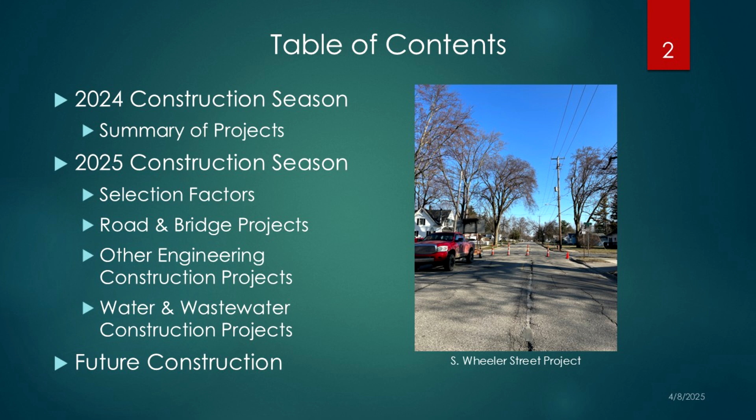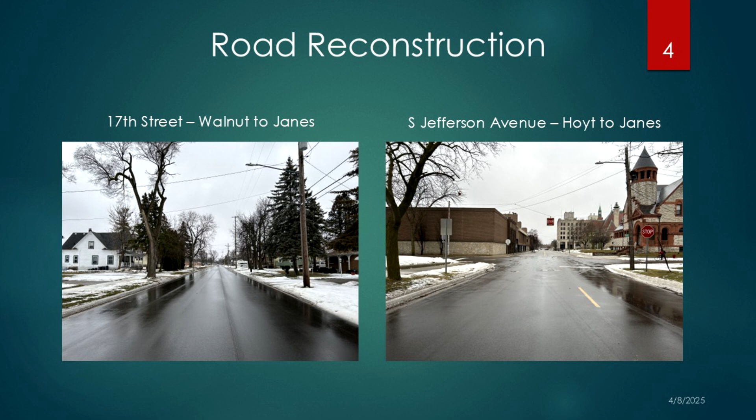2024, two of our road reconstructions: we did 17th Street from Walnut to Janes, which finished up the 17th Street corridor, and South Jefferson Avenue in the historical district over by the Castle Museum. We also did some road rehab on Sheridan Avenue, which included a crush and shape. We took that road down from 4 lanes to 3 lanes and added bike lanes on both sides.

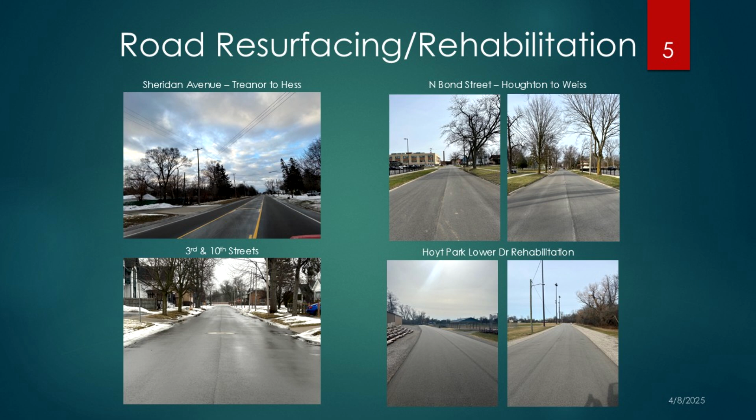Then with our CDBG money, thank you Planning Commission, we did 3rd and 10th Streets last year, and North Bond Street with the next fiscal year of CDBG money. We also did Hoyt Park Lower Drive, which I believe was the 101 funds. That was a nice cap on the Hoyt Park improvements, and as you can see, they're getting close to finishing their pavilion.

We did have one bridge project last year, the Center Street Bridge. We just had to do some steel beam repairs, so not a whole lot on that one.

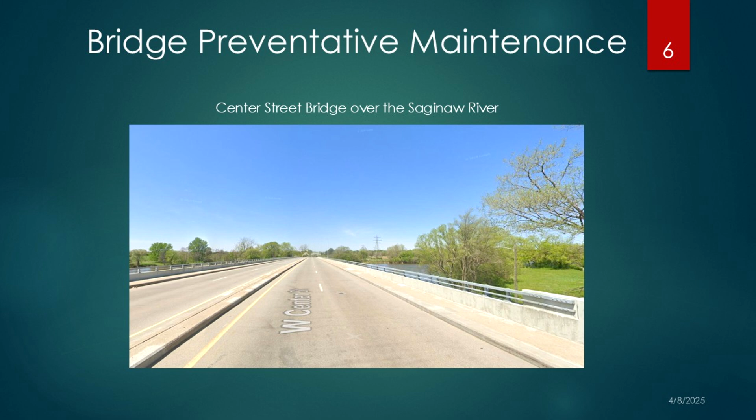Before I get into this, I realized a couple years ago we had some newer council members, so I had a couple slides on funding. I didn't put those in here, I apologize, I just want to do it quick.

Act 51 revenue is state and federal gas and weight tax, from gas taxes as well as Michigan license plate registration fees. That's how we get our funding for roads. Total, we're about 8.7 million for a year. Now that's not just for projects, that includes pothole patching, snow plowing, signal maintenance, pretty much anything you can think of, tree clearing in the right of way.

So of that, about 2 million is for local streets and the rest is for major streets. We also get about $1.2 million in federal funding through our planning organization, and those only go towards federal aid eligible roads. So you'll see, I'll point those out when we get further on.

And I apologize, I don't have slides for these, so I'll be switching here in a minute. We also rely heavily on some CDBG money every year, and thank you again to Planning Commission for recommending that award for this year.

So we try to hit a lot of those roads in the fair category to keep them from getting to the poor category. We look at traffic generators like the hospital and schools, and try to pick commercial areas as well, to benefit the most commercial people and residents in the city and make our dollar spread as far as possible.

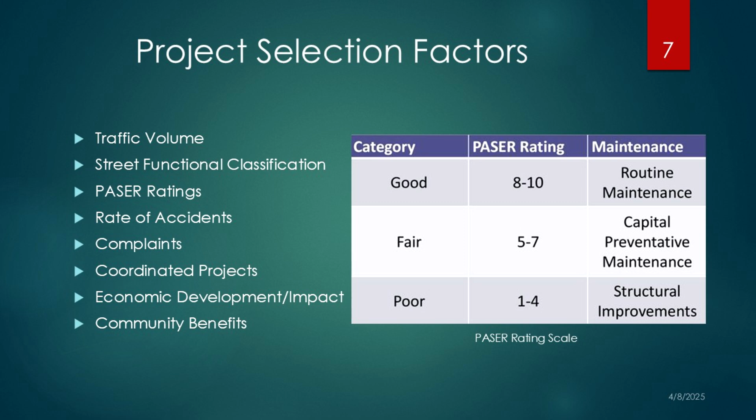This is a pretty ugly chart. These are our PASER ratings: red being poor, yellow being fair, and green being good. Just a snapback to 2021, about 4 years ago, we are improving slightly on both, it's just the funding's not keeping up with some of the inflationary dollars as well.

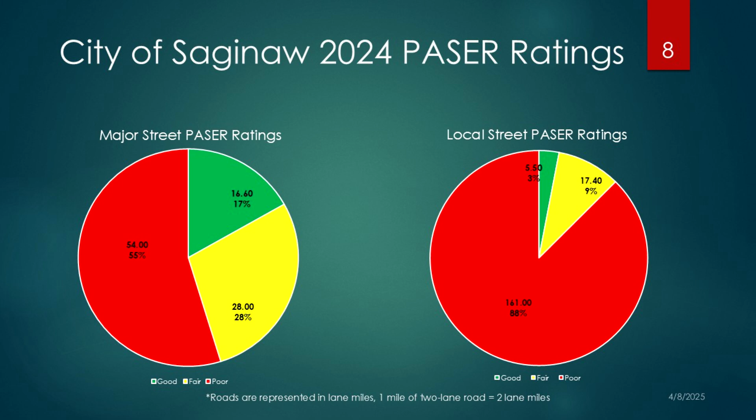Cost of construction's going up, and funding isn't really keeping up with that. Our goal every year is just to maintain our overall PASER and not make it worse. That's all we can do, which is unfortunate. I hate to say that, but that's what we do.

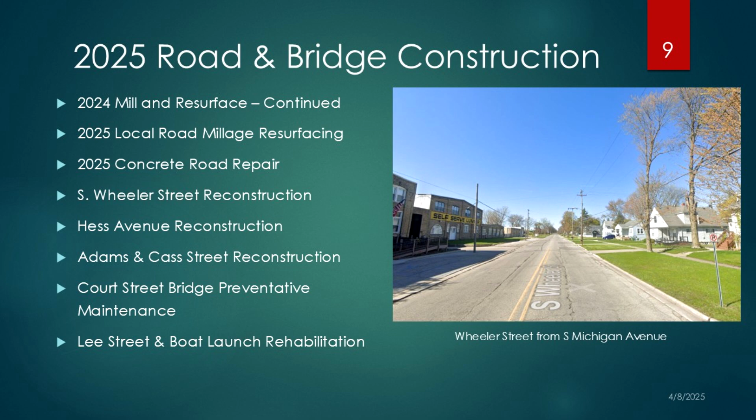During the winter, the asset management plan was completed for water and sewer. So we're looking to add water main work on Fayette from Court to Madison, that's 4 blocks, which is on the CC. That's the majority of the increase on that CC. But we did add Harrison as well, a critical link for Covenant, because we had good bid prices, so we wanted to add that money to this PO as well.

Besides Harrison, we're going to be doing Fayette, Webster, and all the streets bordered by Webster, Madison, Court, and Michigan—that 3x4 grid area. We've already done some of the ramps. We're looking to resurface those roads after the water main's been done, assuming approval tonight. Hopefully once that's done, we'll have those completed by end of June.

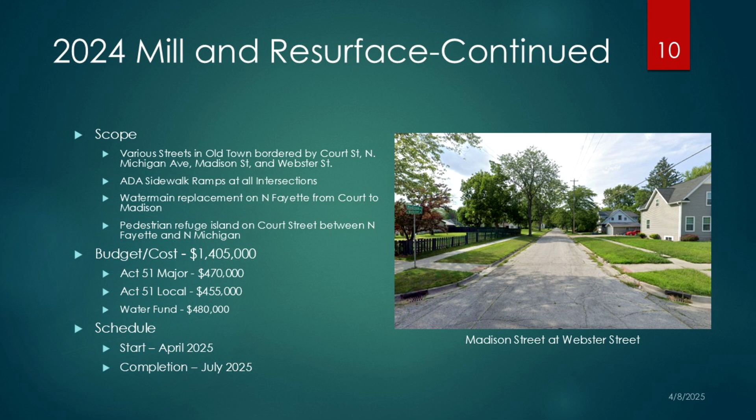As you all know, in 2024 we passed a road millage countywide. The city gets about $1.2 million of funding from that for local streets every year. We started getting some of the deposits this spring, and in the new fiscal year after July, we're going to start implementing some of that money. The first area we're looking at right now is between Court and Mackinaw and Webster and Mason.

I think the estimate right now says 1.2, but we're probably at 1.3 or 1.4. We're going to try to use some of our local street funding as well to do that. That'll be a good sized project for us—about 3.4 lane miles, which is almost 2 miles total of actual road being resurfaced. We're looking to start that in July and have it done about Halloween.

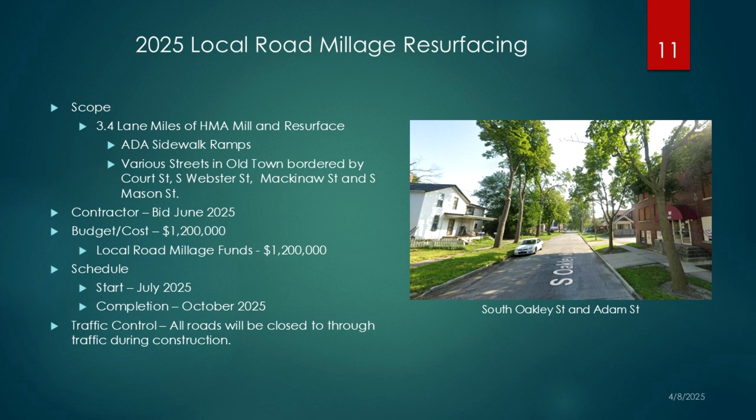Concrete road repairs—this was on here last week, but as of today, if we finalize our budget cuts, unfortunately we will not be able to do this project. So, apologies.

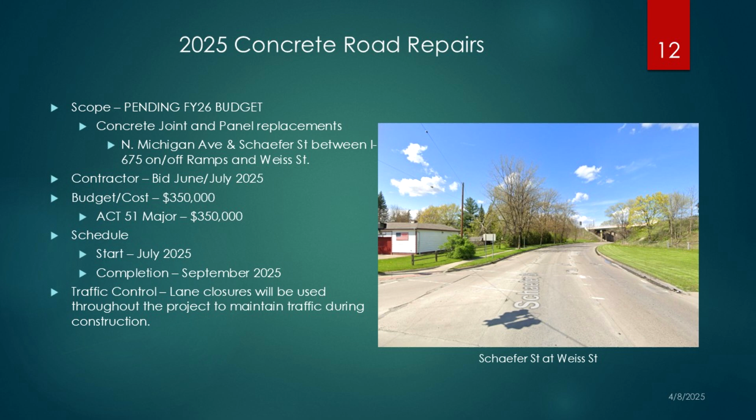Here's our big project, probably the largest road project the city's done—I can ask Phil, but it's probably one of the largest in the last 20, 25 years. It's a full mile of Wheeler from Michigan to Gratiot, full reconstruction, brand new water main the whole stretch, and also from Ring Street to the south we're doing a mainline sewer, which is the first time we've done one since I think 2017, 18.

It's a kind of unique project, and with this one we're also replacing the railroad crossing, about halfway through that section. We're utilizing 1.44 million of federal funding, and then the rest, as you can see, is road funding, water, and sewer to make up the match. It says we're starting March 31st, but they're not actually starting until next week. We're looking at a completion probably around the end of October.

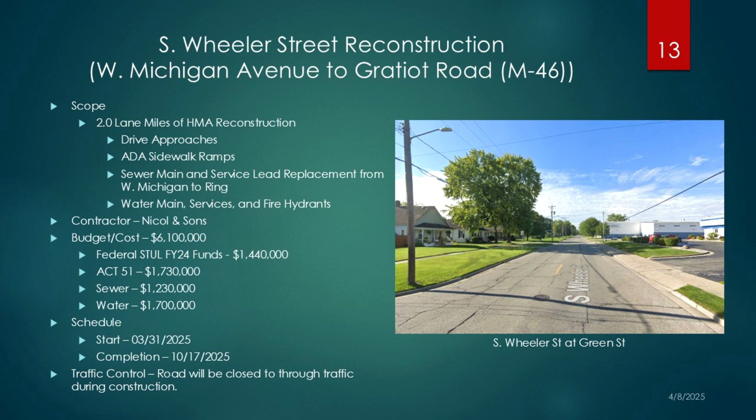Hess Avenue reconstruction—this is also using federal money. This is the last fiscal year we received extra money for a couple of years, so we've got a lot of federal jobs this summer. This is a reconstruction from Jefferson to Sheridan, half a mile. We're going to be converting this from 3 lanes to 2 lanes, and hopefully converting from 1-way to 2-way as well.

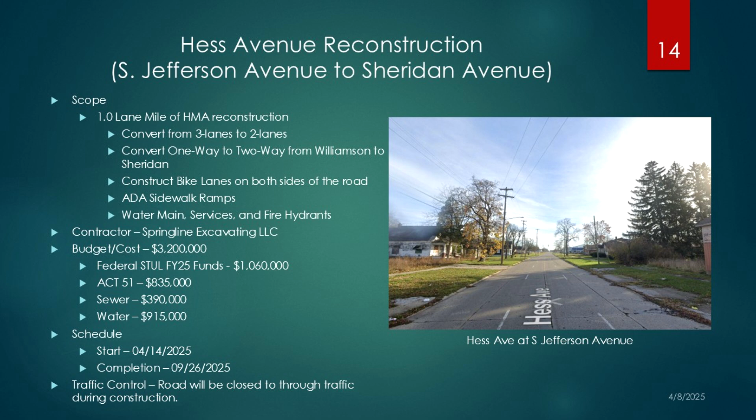That'll be coming probably at the next 1 or 2 council meetings for approval. We're hoping to get that conversion to happen from Williamson to Sheridan. With this project, we'll also be putting bike lanes all the way from Williamson to Sheridan to connect with the bike lanes we just put on Sheridan. Our goal is to eventually get them to Center Street Bridge so we can connect with the trail and the Iron Belle that crosses there as well.

Next one is Adams and Cass Street. This is the one we've kind of all been waiting for 4 years. We're putting back Cass as a brick road, brand new brick. We got a TAP grant for this in the amount of about $825,000. This is a project we're kind of excited for. We'll have an archaeologist on site because there may be some sensitive areas there. We're hoping we don't find anything, but if we do, I want it to be a mastodon.

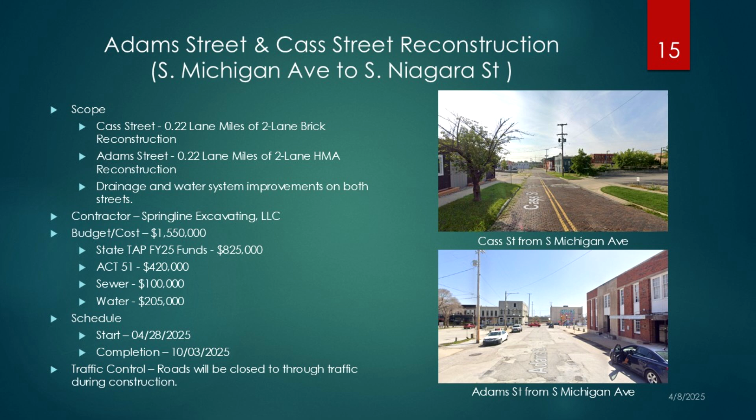They found one on the west side of the state maybe 2 years ago, and that was pretty cool.

We have, and I'm sure everyone has seen, a lot of work going on around Ezra Rust and Court Street. We do have the Court Street Bridge closed. I have a completion date of June 20th, but we're hoping to have that open sooner. They started early and they've been hitting it very hard with the good weather we had for a while. We've got a lot of deck and sidewalk patches there, railing repairs, and we're replacing all the handholds for the street lighting. That project is funded 95% by state and federal bridge funds, which is a program we utilize every year. It's the best bang for your buck you're ever going to see for grants.

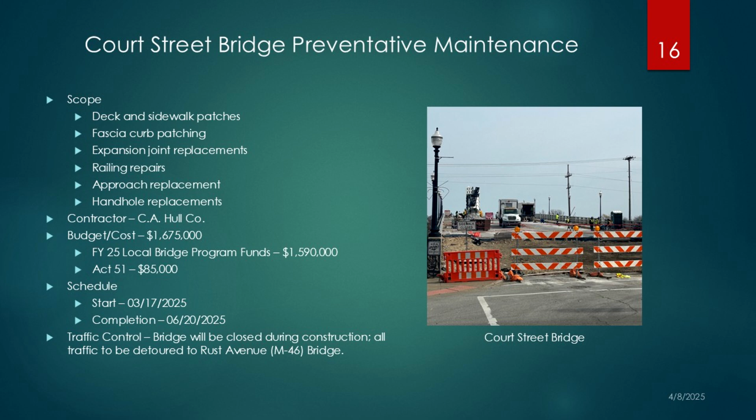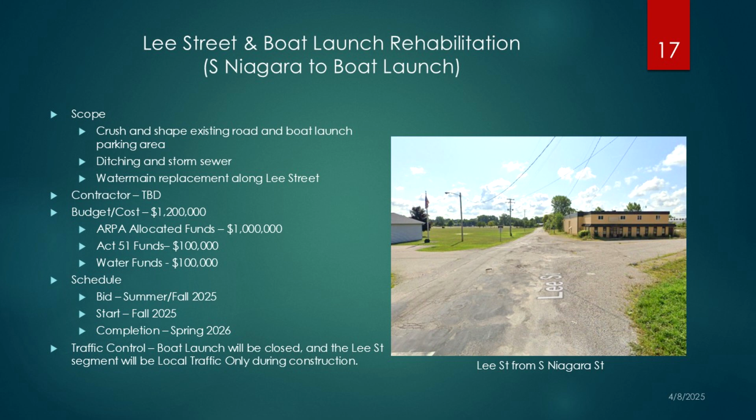Next one is Lee Street and boat launch rehab. Lee Street goes from Niagara down to the Rust Avenue boat launch. This project is going to be utilizing ARPA funds. We were able to add some of these extra projects with ARPA from the Ojibway Island savings. We saved probably about $2.5 million from the bids on the Ojibway Island stabilization project, and so for park purposes, we're utilizing that here. So we're excited, this road is a local road, we don't have a lot of funding for it, and the boat launch is in need of some serious repair. We're hoping to start that in the fall, probably complete it in the spring of 2026.

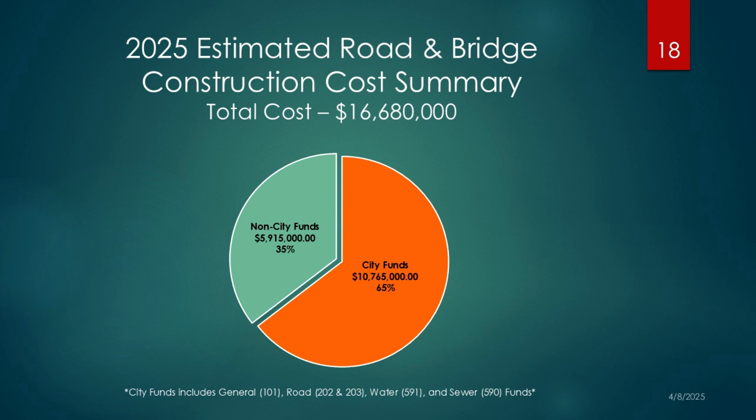This is just kind of a snapshot here. We do this every year just to show where we stand. Right now we have about a 65% match on our grant funding, so 35% includes the federal, CDBG, any bridge funds we have. Last year was 50-50, it was a good year. So we try to stretch the dollar as much as possible.

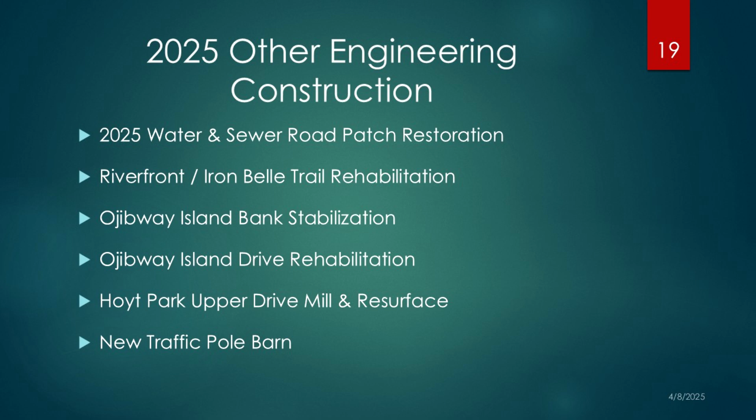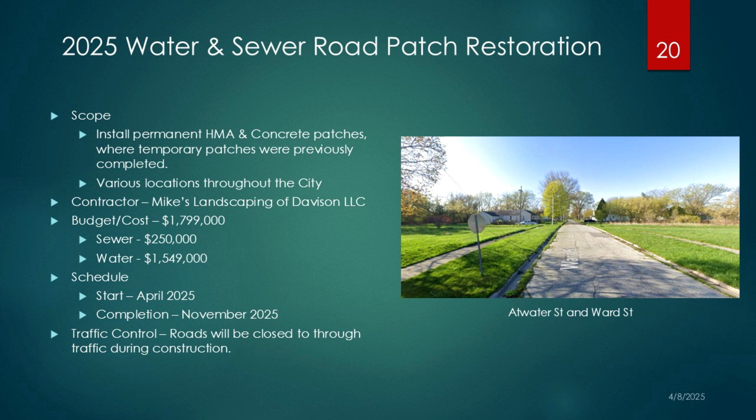Some other kind of non-road projects, per se. As everyone knows, we're replacing lead lines in the city as fast as possible. I think they all have to be done in the next 10 years. Our guys can't keep up, so we're continuing to bid out water and sewer patch projects, which I think was awarded maybe 2 meetings ago for the next round. So this is probably going to be a yearly project for a long time until we get caught up, but I just wanted to throw that on there.

We also got a grant from the CMF Spark program for the Riverfront Iron Belle Trail rehab. This section goes from Wickes up to Ojibway Island. We did the Wickes Park piece 3 years ago, I believe it was completed. This is a zero match grant, excuse me, we do have some extra costs in here. We added some extra work, so we'll be matching some of that. That will include rehab of that trail and also adding a trailhead on the south end. This picture here is actually that gravel loop that's just off of Fordney at Wickes Park, and we're going to be paving that loop as well so it's not underwater every time we get a rain event. We're also putting in probably 7 or 8 parking spots there for bikers.

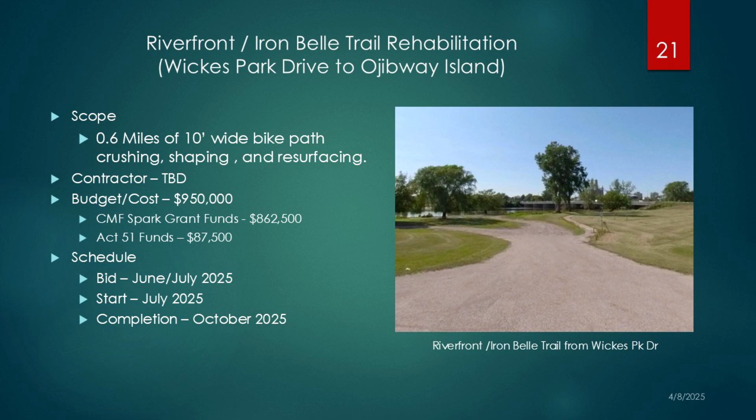Ojibway Island and Crayola Park bank stabilization. I'm sure everyone's seen a lot about this project. It's finally underway after we got our EGLE and U.S. Army Corps permits. They started this week, I think, actually. We're looking at completion in September 2025, we're expecting to be done before then. We're all aware that fireworks get shot off of Ojibway Island, so we'll be coordinating that. If we're not done, we'll coordinate to make sure that still happens. That project is 100% ARPA funds.

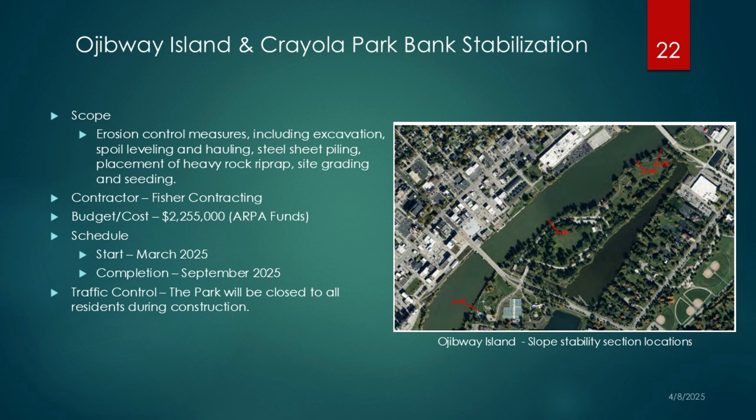And then the next one, with the good bid prices we got, we were able to add the drive rehab as well. We'll have the brand new bank on the west side of the island, and we have probably 7,500 tons of stone coming in for that bank, and we knew this road would be gravel by the time all those trucks were done. So it's a good time to wait till the project's done, come back in, crush all the roads, and put new pavement down.

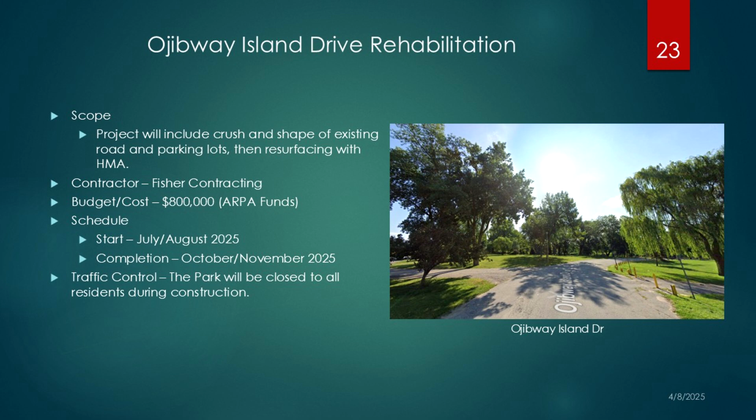That includes all the parking lots as well. We're also doing stage improvements through our facilities group. Hopefully when we're done this summer, maybe in the spring, Ojibway Island will be pretty new, and hopefully we can get some events back there.

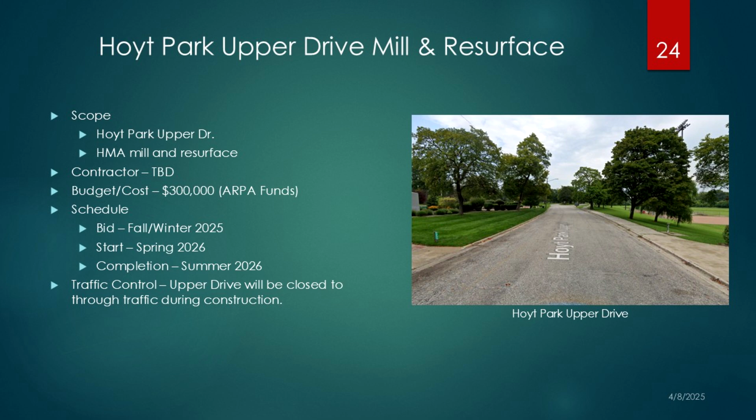Also to cap off Hoyt Park, we have a quick and cheap mill and fill on the surface of the upper road, that's the section by the warming house, just off of M13. We're going to utilize some of that extra ARPA money for the parks for that as well.

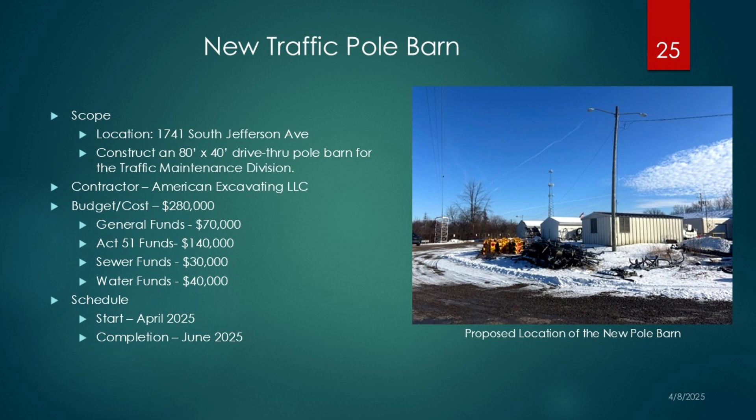One we're excited about, thank you for giving us funding for this one. We had 3 sheds that were probably 50 or 60 years old that we've been band-aiding together, so we were able to get funding to build a new pole barn out at traffic maintenance. We have 2 brand new trucks within the last 3 years sitting outside, and we're building this not only for those, but also to store sign material, posts, street lighting, you name it. This is going to be really nice, getting a lot of our stuff that sits outside to actually be somewhere inside.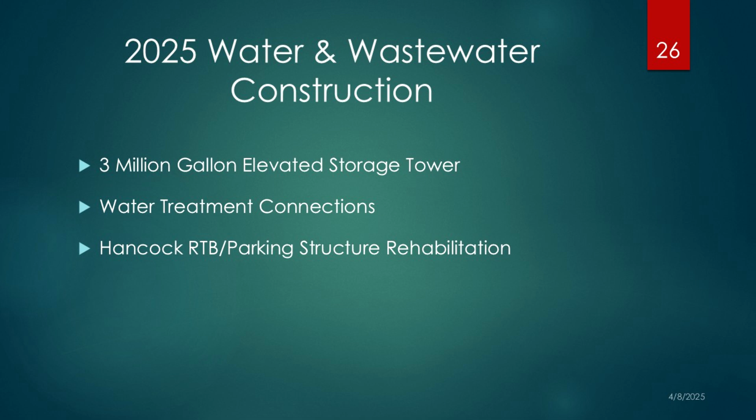But the big one, I'm sure everyone's seen by now, the tower is up. It's as high as the pedestal is going to go. Now I think they're working on building out the tank itself. We're still looking at, I believe, Christmas completion of 2025, towards the end of the year. A large majority of the budget is a DWSRF grant that the state provided, so that's a huge project, and it'll be great for reliability of our system once it's complete.

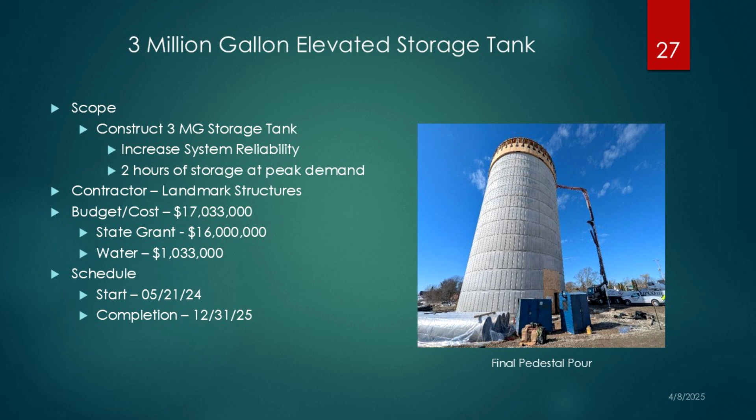Kind of a side project for that same reason, we have the water treatment connections. This is why Ezra Rust is closed. There's about $8 million worth of piping work out front of the water plant to accommodate the water tower once it's up and running. These projects are on the same schedule, so we're hoping they'll both be done around the same time and we can bring the water tower into service.

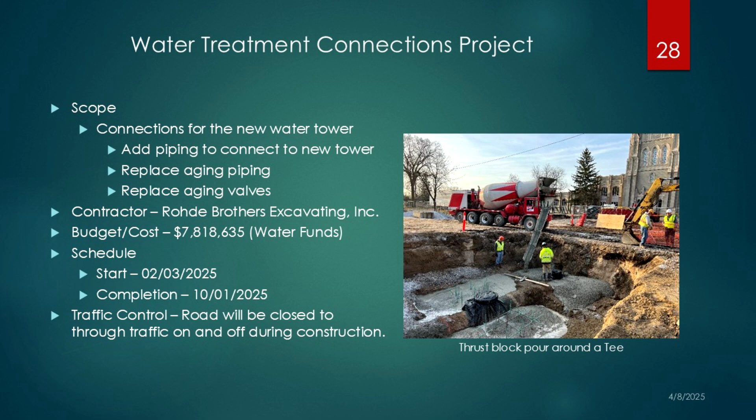Another one, about half ARPA, half sewer funds, is the Hancock CSO basin, as well as the parking structure at Hamilton and Court. If you haven't been out there lately, there is no top deck on it right now, all you can see is beams. It's kind of weird and cool at the same time to see that. There's a lot of work going into it. We have another 6 months or so before the project is complete, but the deck will be brand new and in good shape, lasting another 35, 40 years or more with maintenance. The CSO basin will be secure after this project is done as well.